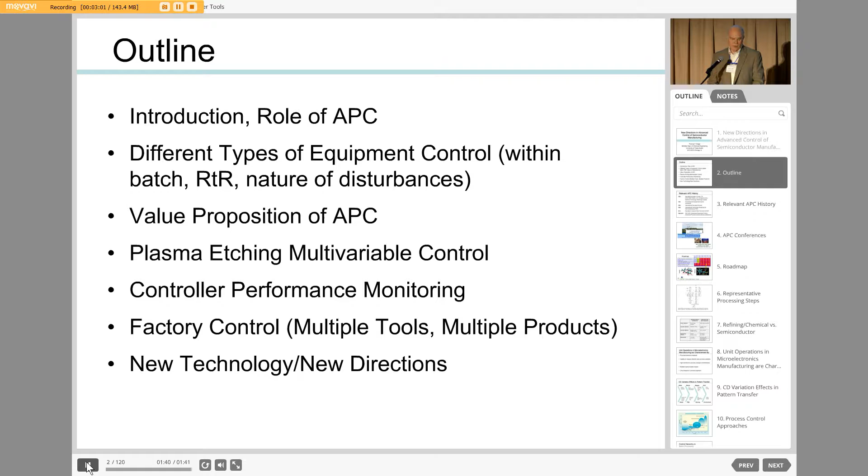So here's some history that gives you an idea about how APC came into the semiconductor industry. Probably one of the signal events that occurred back in the 80s was the formation of an organization called Sematech, which was really founded to combat the semiconductor activities, especially in Japan. So how can the U.S. compete? They viewed this as a defense imperative — that we need to be able to support this industry, not rely on foreign suppliers for chips for our defense industry.

So they put a bunch of money into it. They said only U.S. companies can be involved. And they actually started on this idea of technology roadmaps, which is, I think, a rather unusual part of what makes this industry rather interesting.

It didn't seem like they worried too much about control of equipment. You would basically buy equipment from a vendor, install it in your plant, and hope it works. Of course, they had their own software in there, their own ways of hooking up to the rest of the process. In fact, some of the equipment may have been built in garages in Southern California, for all I know. So it was really lots of different suppliers and vendors.

But then we started seeing some order out of the chaos, and they started having workshops on advanced equipment control — how do we do a better job of controlling the various unit operations in semiconductor manufacturing, et cetera. Then the wind kind of went out of the 'protect the national industry' push in '96. It became an international organization, so companies from outside the U.S. were welcomed in.

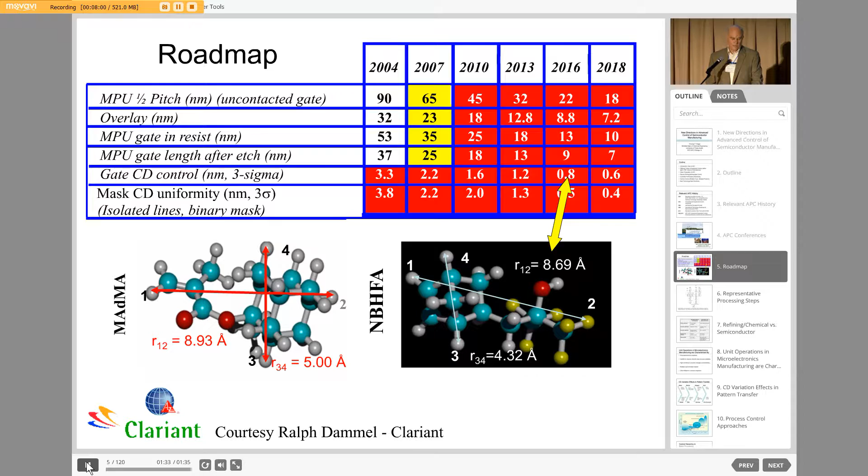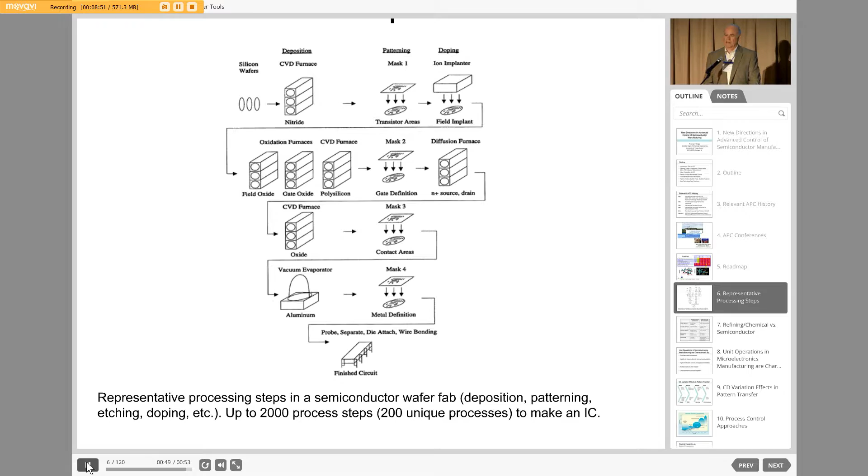So here you see maybe 10 different unit operations. Well, actually, in some fabs you have up to 2,000 process steps as they build up these layers of material, and that might involve 200 unique processes. So the complexity of what's going on here is just staggering, and it's a wonder that they can actually make the devices they intend to make.

It's also helpful to understand how this may be different, since many people may be more familiar with process control in the continuous industry, like refining and chemicals. We have different objectives in the semiconductor industry. First of all, it's largely batch and discrete rather than continuous.

Your primary objective is to end up with a device that has the right electrical properties, but then you're also going to try to control things like line width and critical dimension. And then for economics, you're trying to maximize yield and minimize cycle time so you can essentially make the largest number of good chips as fast as possible, using the equipment you have there most effectively.

The other problem is that once you make something, it's hard to unmake it or rework it. In refining and the chemical industry, they have storage tanks where they can say, oh, we missed the target on this one, let's blend it with something else. That's a luxury you don't have in the semiconductor industry.

And there's lots of measurements. In fact, there's no data famine that seems to be appearing here. There's plenty of data being produced.

So when you look at the different unit operations, what are their characteristics? Well, they're very physically and chemically complex. They are, in the end, either physical or chemical processes. There's a lot of things we can't measure. In fact, very rarely can we measure what's going on in the middle of one of these unit operations. We have to wait till the end.

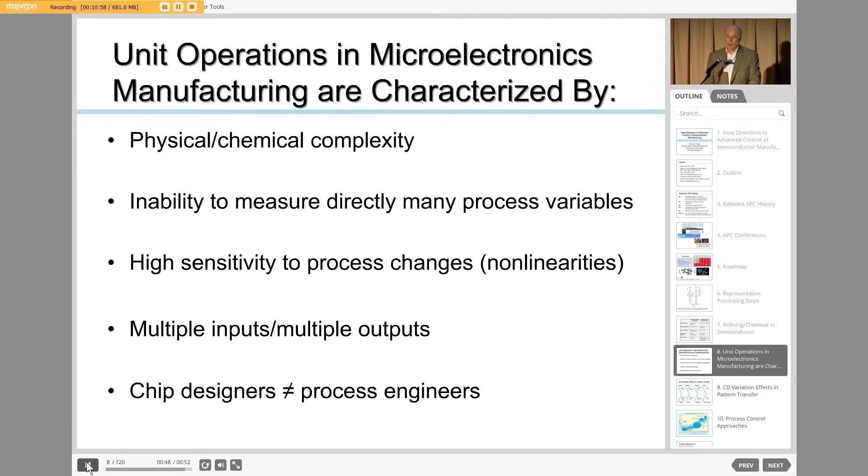They're very sensitive to process changes, nonlinear processes, and they all tend to be multiple input, multiple output. The other thing is that the people who design the chips are not the people who operate the plants. So as a result, there's sometimes a mismatch. Someone says, oh yeah, this will be a great chip with certain characteristics, and then the guys in manufacturing can't figure out how to make it or operate it successfully. So those are some of the challenges you face.

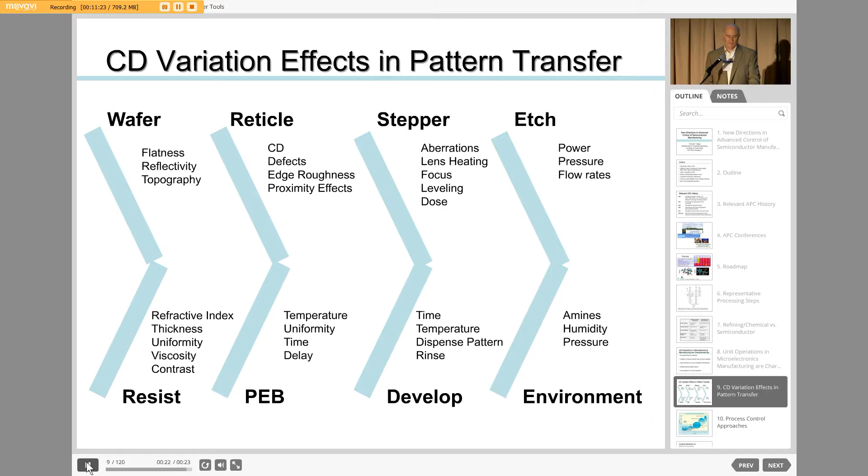You can actually have, from the time a bare wafer goes into a fab until the product finally comes out after going through all the steps, it might be 6 weeks. So from a scheduling and operation standpoint, it's very complex.

We can also worry about other things, like do we control each wafer, or do we have a bunch of wafers and try to control representative wafers that we can sample? But again, the big challenge is it's hard to get data in the middle of the operation. You almost have to wait most of the time till the end.

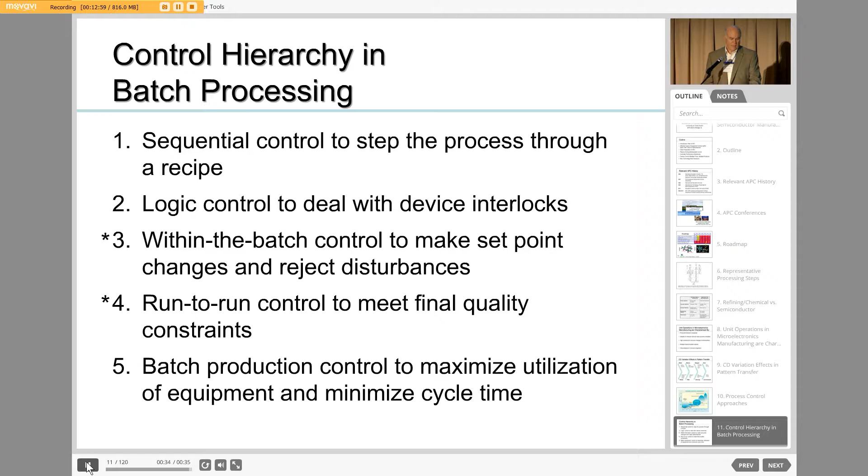Some of the characteristics: we have to satisfy the final product quality at each step along the way. If you do the math, if you're going to have 200 sequential steps and you're going to have 99% yield at each step, and you multiply those out, 0.99 to the 200th power, you end up with a fairly low yield overall. And so that's the challenge. Every step has to be done very well.

The other problem is that because you have a different industry that provides the tools, plasma etching, CVD, etc., to the manufacturers, they have to figure out how to combine those pieces of equipment with the way they operate their fab. The problem is you usually can't modify the hardware, software, or the tool, and that creates big problems. That, again, is another driver for why people have gone to run-to-run control.

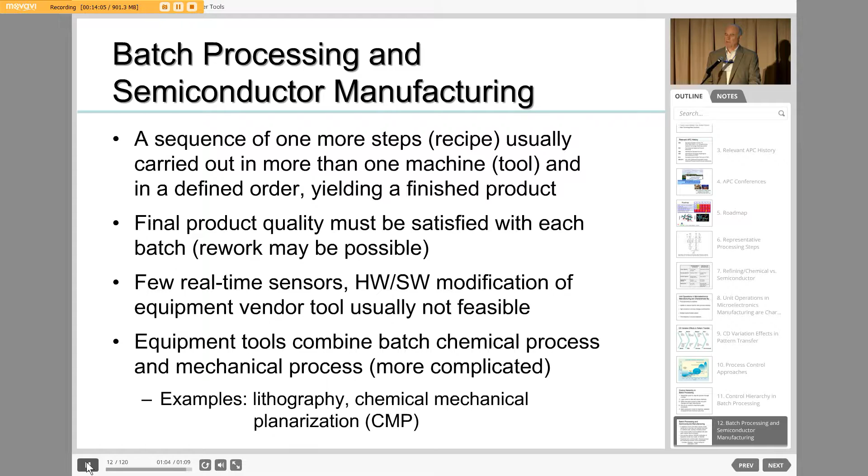The other part of this is that it's very complicated operations that can involve both chemical steps and also mechanical steps. A couple of examples would be lithography, and CMP, chemical mechanical polishing, or planarization.

It used to be that you have these gigantic fabs and lots of people running around in what we call bunny suits, and you had to control particulate matter, and it was just a very difficult situation. So the industry's gone more towards controlling what goes on in the tool, having a lot fewer people operating, and in fact moving everything around with robotics instead of having people moving these things around, and that's been largely implemented in the big fabs today.

Some other things we can do with batch processing that makes it a little bit different is that sometimes when things aren't going well in the batch, we actually can adjust the amount of time used for a certain process. You can decide, well, I'm going to etch this one maybe a little longer this time. So we can take advantage of the fact that this is a batch process.

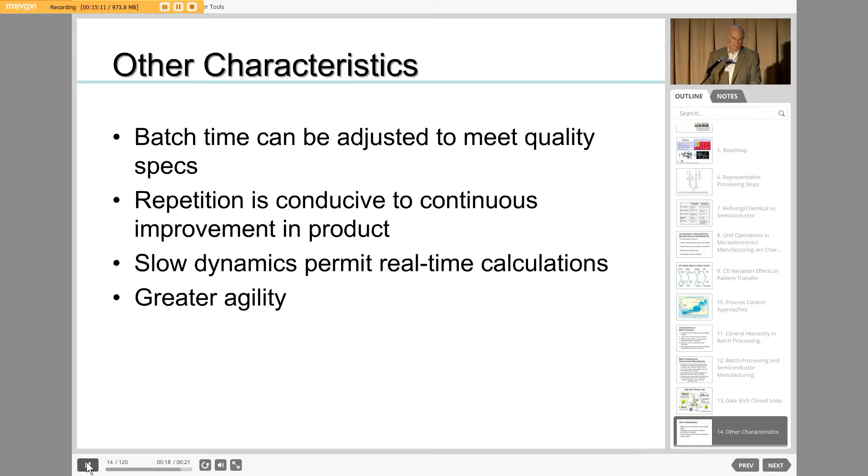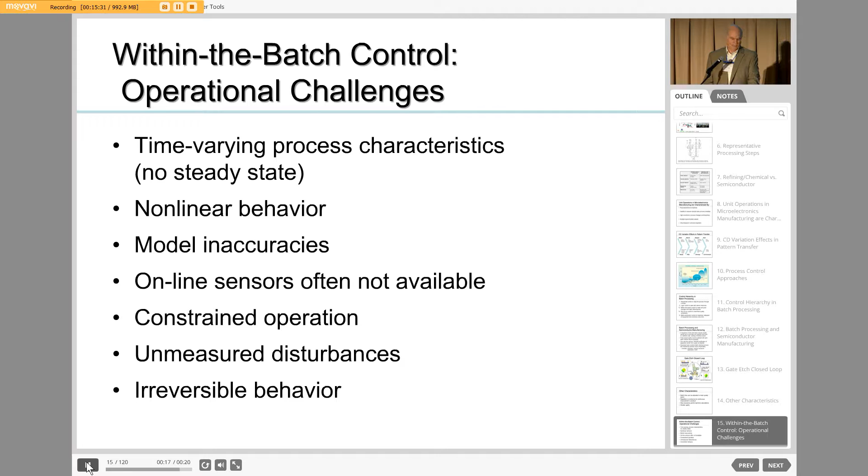Again, there's lots of challenges within the batch control. I'm going to talk about a couple of examples of where this is actually useful. Again, there's the whole problem of modeling it, nonlinear behavior. We don't have sensors that are going to do the job we need during the batch, et cetera. Lots of disturbances, behavior that's irreversible.

This worked pretty well as long as you had only 4-inch wafers. Once they went to 6-inch wafers, they started finding that the uniformity of the wafer was becoming a problem because of the nature of the heat transfer in the furnace. So gradually the industry moved towards single wafer control so they could actually do a much better job of controlling what happened on an individual wafer.

And the wafer size has actually grown over time. After they had 4-inch wafers, they went to 6-inch wafers, then 8-inch, then 12-inch, which is currently pretty much the max size, although interestingly enough, there are lots of 8-inch fabs out there and processing units that people use. They can make a profitable product, and as someone said, they've all been depreciated, so they actually have a low cost of ownership as well.

But basically, this is a way in which we get much better control of what happens on the wafer. There's talk about going to 18-inch wafers, or 450 millimeter wafers. That one is unclear. I couldn't get, when I talked to people in the industry about whether they really think that's going to happen, it's a very expensive proposition to talk about now all of a sudden changing your whole fab to a new generation of equipment. So again, there's some big economic barriers to doing that.

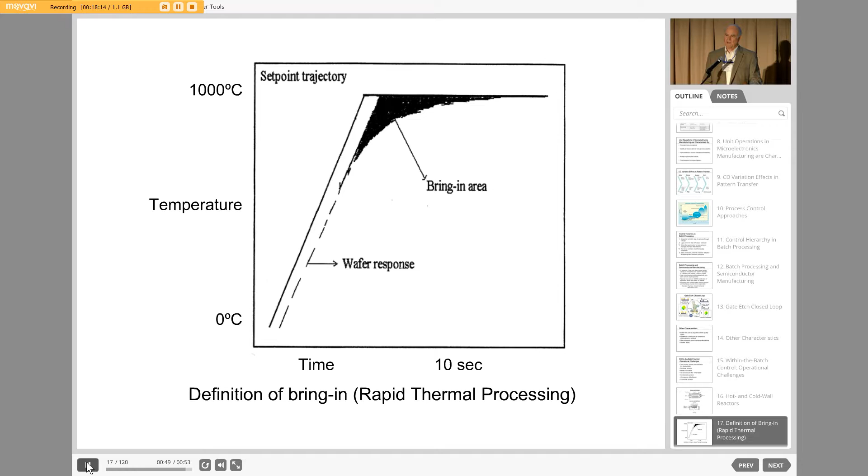This is something that's familiar to most of you in the room: we have a set point trajectory, and we like to be able to follow it. We have this black area there called the bring-in area, and essentially our goal is to minimize that. So we like to track the set point as closely as possible. You might say, well, why don't you just overshoot it? Well, if you overshoot, then you start damaging the material, and it doesn't turn out to be high quality. So we've got to actually bring it in as fast as possible with as little overshoot as possible.

So here would be a typical RTP reactor that's got these lamps that are radiating heat on the reactor. You can kind of see in the picture here, there are some maybe concentric zones of lamps there.

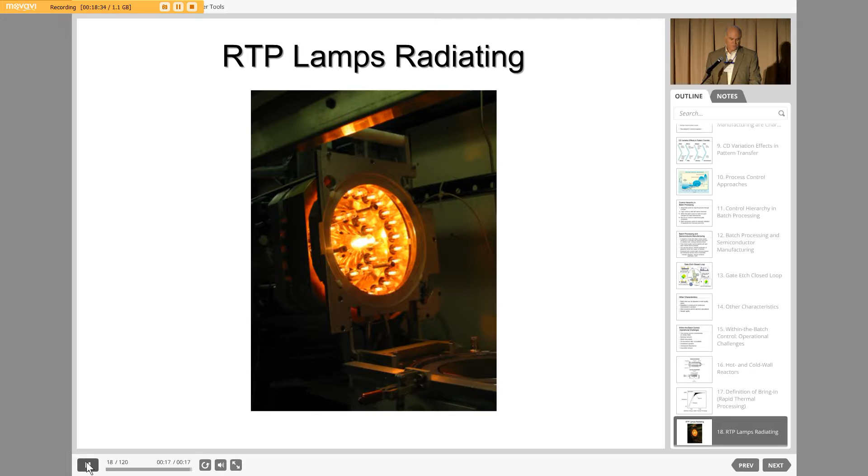In this case, we actually had thermocouples that we mounted in the wafer. Of course, you can't do that for actual practical operation. But again, in the early days, we were trying to show that we really need multivariable control in order to successfully control a reactor like this.

This was part of a DoD program in the early days of semiconductor manufacturing, 1993. And the student I worked with basically developed a nonlinear heat transfer driven model, and because it's radiation, you have T to the 4th terms in there, so clearly nonlinearity is at work there. We like to be able to control this thing in real time over a space of 10, 20 seconds.

So having used some of the ideas of model predictive control, or QDMC, formulated as a successive linearization type of problem. And then here are the results we got.

You can see that, if we're trying to ramp this system up from 400 up to 800 degrees C, we do a pretty good job of being able to get all 4 of these thermocouples to track the desired profile. Again, a little slower than maybe we wanted, but anyway, we were able to show you could do it and do it in real time, because the computer is basically cranking out new models as you go along, as you get up to the higher temperatures.

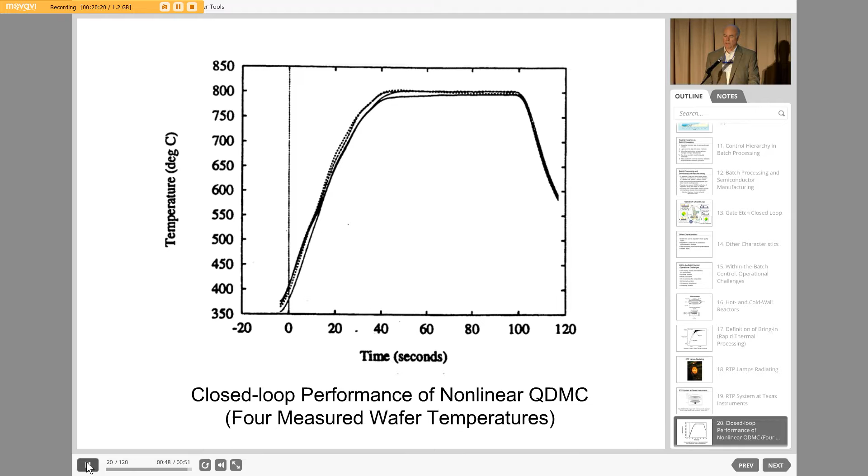So this is an example of what you could do, and again, this is a sort of approach that's used today. There's a lot of examples of model predictive control that have been used in the semiconductor industry, and I'll say more about that later.

Here's another system that essentially lended itself to model predictive control. This is CMP, chemical mechanical polishing, where you've got these arms that basically push down on a polishing pad that sits on top of the wafer. This is a way, again, of reducing - instead of etching, we actually polish the wafer down, depending on the material we're trying to remove.

This turns out to be, with the 5 arms, a multivariable control problem as well, and we have to worry about adjusting each of these arms. The arms are rotating around as well, so it's, again, a very complex mechanical process.

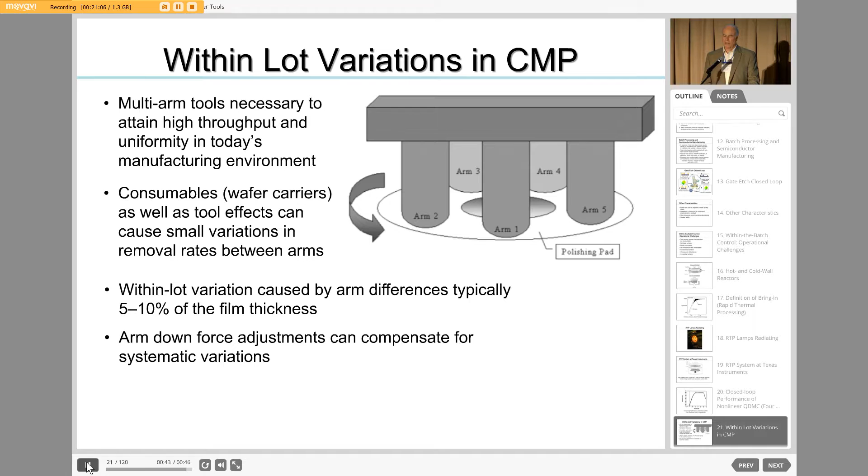We did this basically with the student Jarrett Campbell, who was at AMD part-time and part-time at UT. He had learned about model predictive control in classes, and he said, let's just figure out how we can apply it to this problem, and it turned out to lend itself really well. Having scoured the patent literature, I think this was probably the first application of model predictive control in the semiconductor industry on an actual commercial tool.

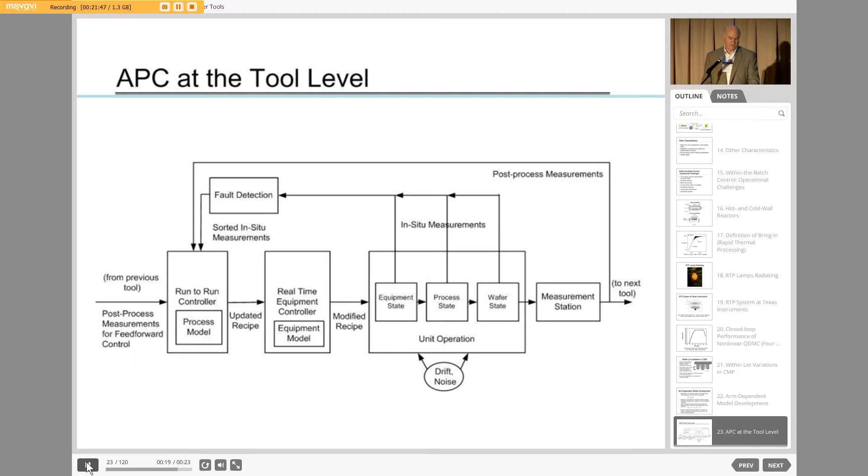So again, we worry about how we do this at the tool level. We're now going to talk about things like run-to-run control - that's part of what you see here. We also have fault detection we have to worry about. I'm not going to talk much about fault detection in this lecture just because of lack of time, but there certainly are lots of opportunities to look at that.

Again, variation is the name of the game here. Things are changing all the time. We've got tools that behave differently. We have different lots, and they get exposed to different tools at different points in time. Chambers change over time. You have what's called seasoning of a chamber, that after a while the chamber operates consistently for a while, but then you start getting deposits internally, and then it doesn't operate quite the same.

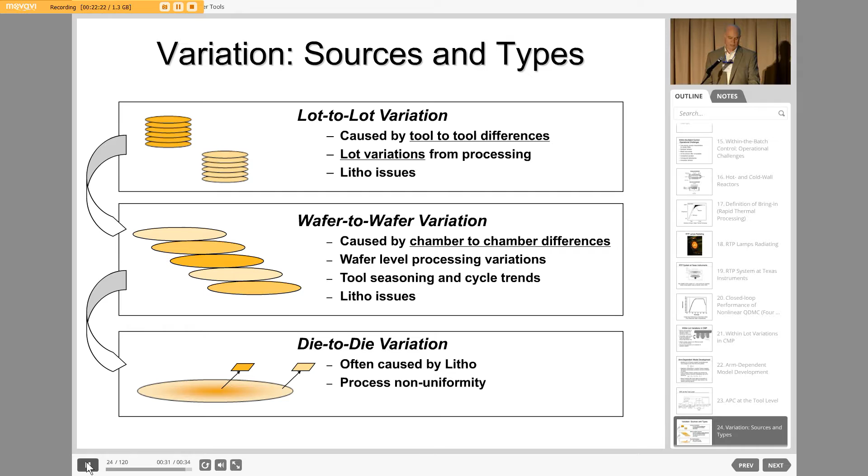So keeping track of all this is very hard to do. I have to decide when I'm going to shut down the system. That's expensive to do, and so on. So those are some of the things we worry about.

So I mentioned run-to-run control. We'll go through this again. There's a few equations in here that we can talk about. The whole idea is because we can't measure during the batch.

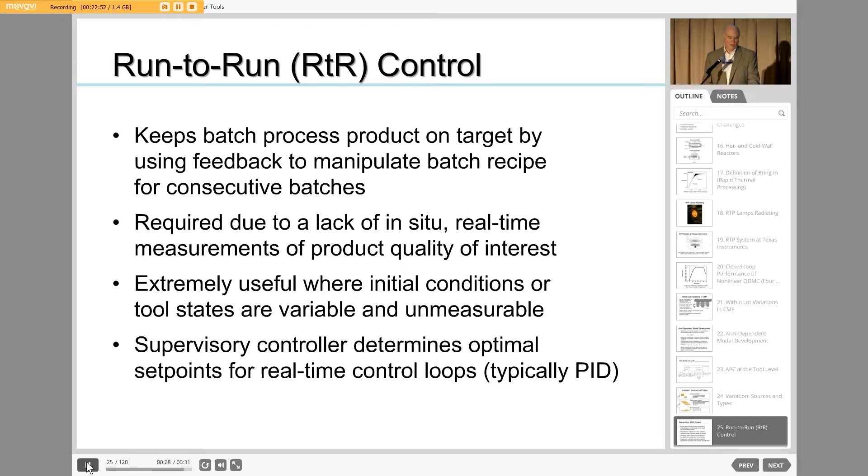It's hard to do. That previous example I gave you, we actually had to put thermocouples on the wafer. Well, that's not feasible in an actual operation. So we're pretty much stuck with saying let's measure it at the end of the run and essentially adjust after every run what we're doing with the process. And so it does set up nicely as a discrete time process, and it is good for handling the kinds of variations and problems we run into, and we can do run-to-run optimization as well.

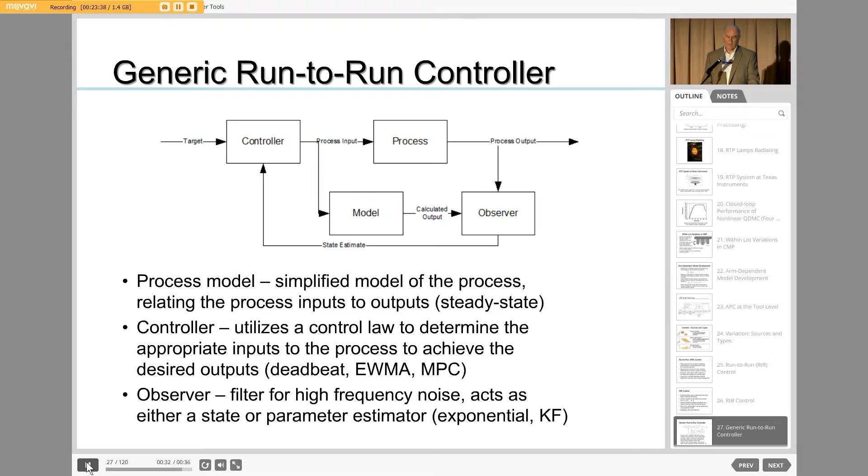This is basically the model predictive control or internal model control viewpoint. We've got a controller which tends to be real simple, a deadbeat controller, or we can use MPC, EWMA. The process is going to be fairly simplified. I'll show you a typical model used for run-to-run control. And then we have an observer that basically has to filter the noise out of the system and other things that are changing as well. So people typically use exponential filters or Kalman filtering.

So here's a standard thing. You might look at this and laugh, say well, that's so simple even a caveman can do it, and that's right. But with all the other things changing in the fab, you don't actually want to add another complexity. So this has been extremely successful. I'm going to show you some results obtained just by using run-to-run control. But basically, the model is really simple. It's linear.

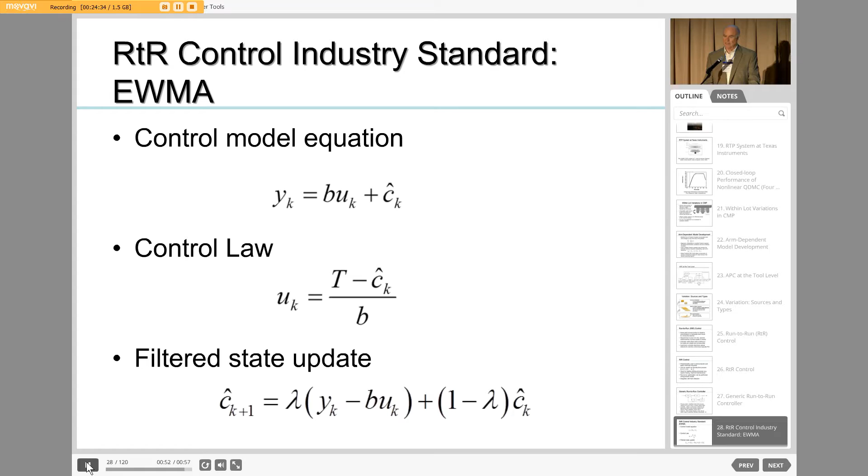Essentially at the end of the batch, you're going to compare the measurement y against the target, and then calculate a deadbeat controller. Then we filter the state update. When you wrap all this together, you basically have an integral controller. We're familiar with PID controllers in the process control world - this is essentially an even simpler case, but it's applied on a run-to-run basis.

And of course, the whole goal is to narrow the distribution as well and improve the CPK or process capability. All these things came out of one of these early studies on run-to-run control, and everyone started latching onto it, saying this is a way we can increase yield, which improves our economics. We'll reduce the amount of scrap we make, since those are lost products you can't sell. We'll be able to run the equipment more often, have a higher yield in terms of good wafers, and maybe run faster and reduce cycle time. So those are all things that affect the economics.

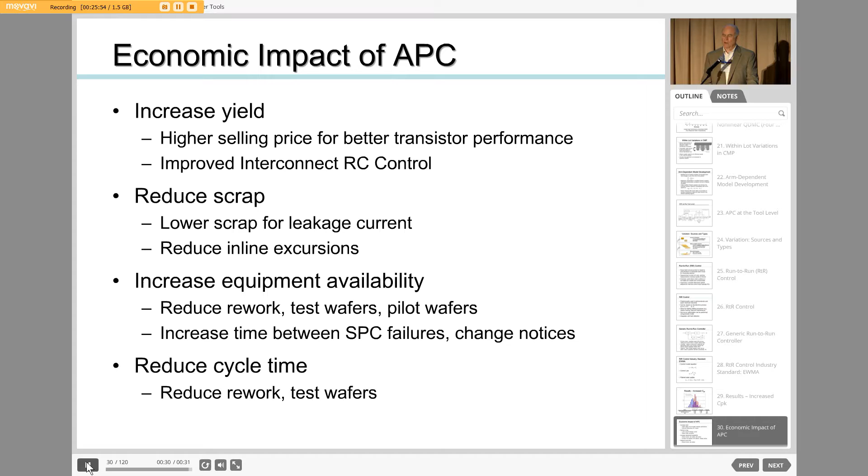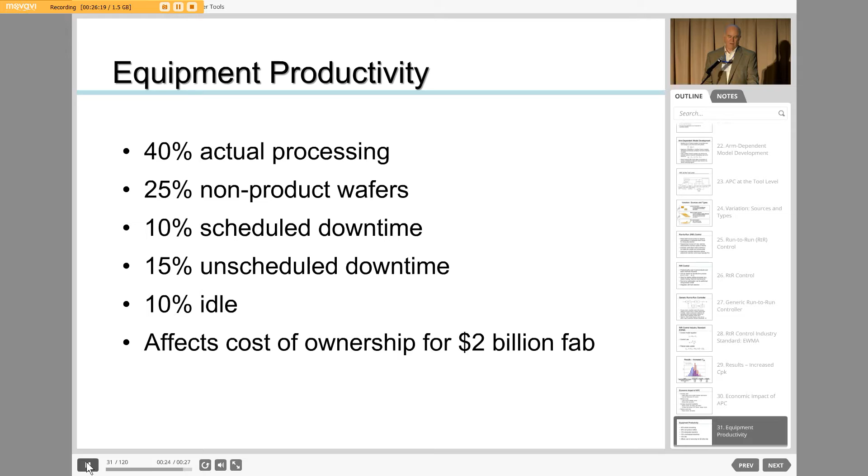In a typical fab, you've got a lot of interesting things going on in terms of when you're actually making good wafers - how often are you sending through pilot wafers to try out a piece of equipment after it's been shut down? That's a cost. You've got scheduled downtime and unscheduled downtime, and sometimes it's idle. The cost of ownership issue is always with you, and when you've got a fab that costs anywhere from $2 billion to $4 billion, people pay a lot of attention to how much the equipment is getting utilized. Here's a good example showing why going to something like run-to-run control was effective in improving CD control on the gate.

So here are just a couple of numbers about what happened in the case I just mentioned: they were able to increase the speed by 8%, reduce the variability, and greatly reduce the amount of bad chips they had to rework.

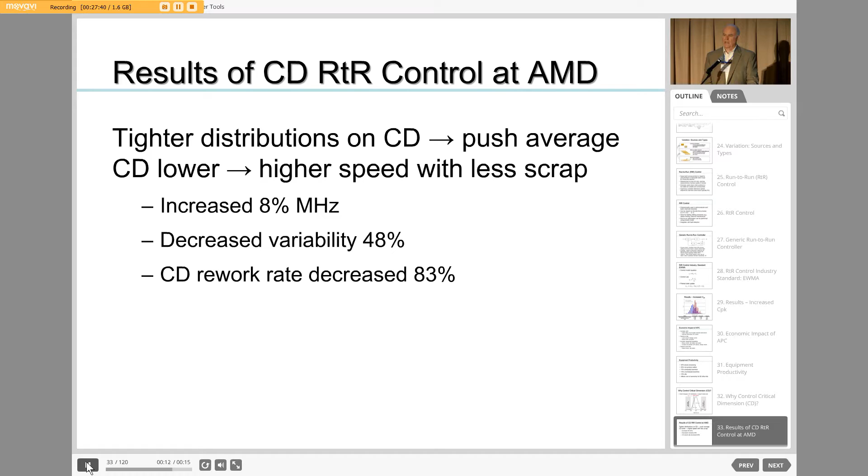And when you translate that into what does that mean in terms of savings or increased profit? This is like the capacity argument. If I can increase the capacity, then I can essentially make a lot more money because I can take all those chips that were bad before, now they're good, and then sell them.

In a competitive business, when AMD was fighting against Intel, that was one of their standard competitors. When they had an improvement, they could sell a whole lot of chips. So this made a big argument. $240 million a year is a fairly powerful argument for why you need a bunch of people doing APC. That argument was actually successfully used at AMD. They hired a whole lot of PhD students from my group and other groups. So that was a good thing that happened.

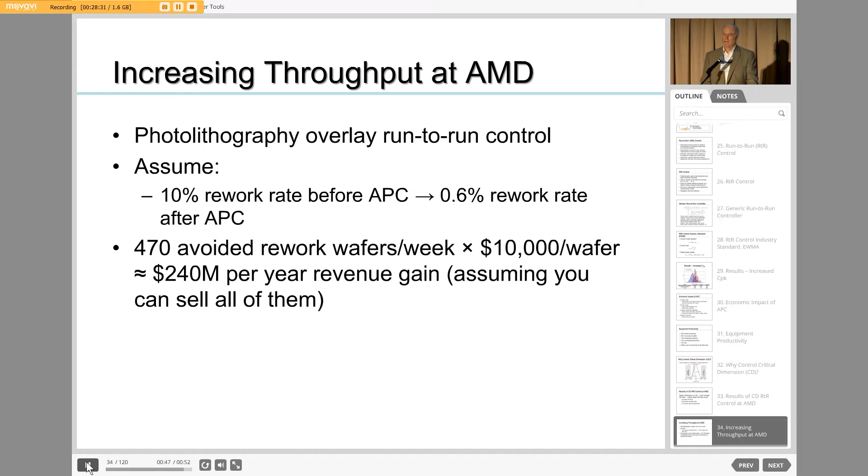So here you get an idea - this was actually some work we did with Samsung - that we could have as many as 1,300 different sensors or data points on a plasma etcher. And the question is, how do I take those measurements and then translate them into manipulated variable actions? Sensor selection algorithms is essentially paramount. I think we've got a lot of work to do on that one. That's not a problem that's really been, I think, well solved yet.

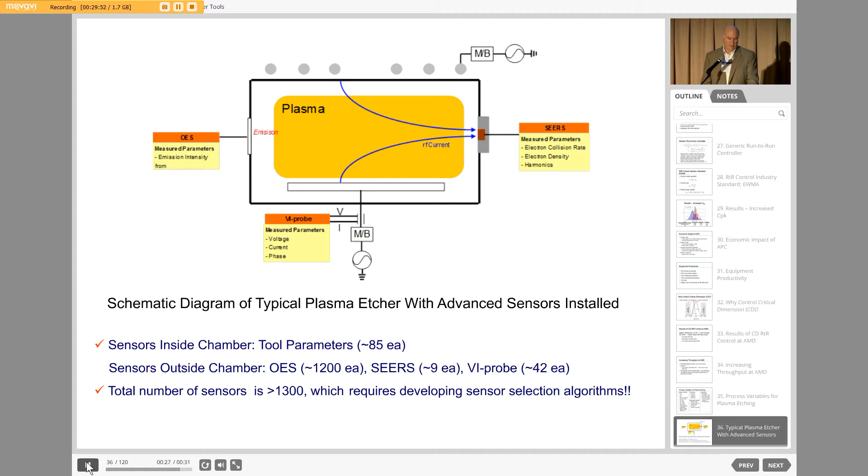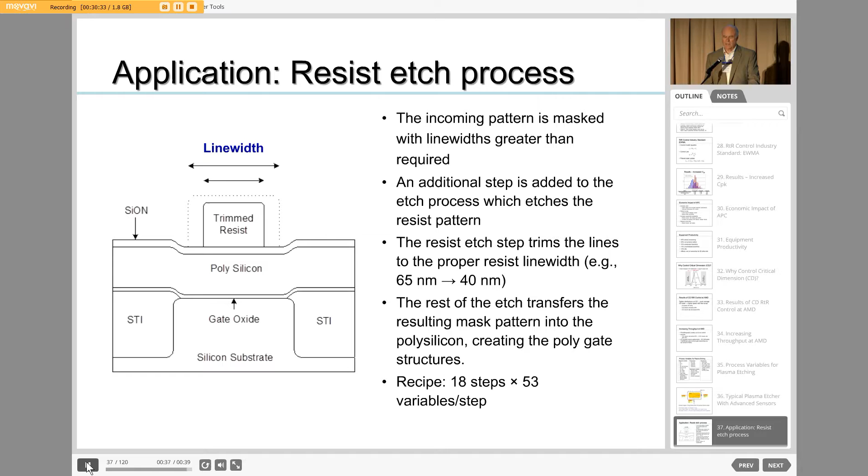But of course, we have to be able to measure things. In fact, in this case, scatterometry, which is fairly expensive, was used as a way of measuring some of the variables. So this project, again, was to look at interactions between lithography and etch. It wasn't just worrying about critical dimension, CD, but also what does the sidewall angle look like? And then finally, what's the uniformity on a large wafer? Are we able to get, for every device that we're going to make on a wafer, a consistent result? So those are the challenges.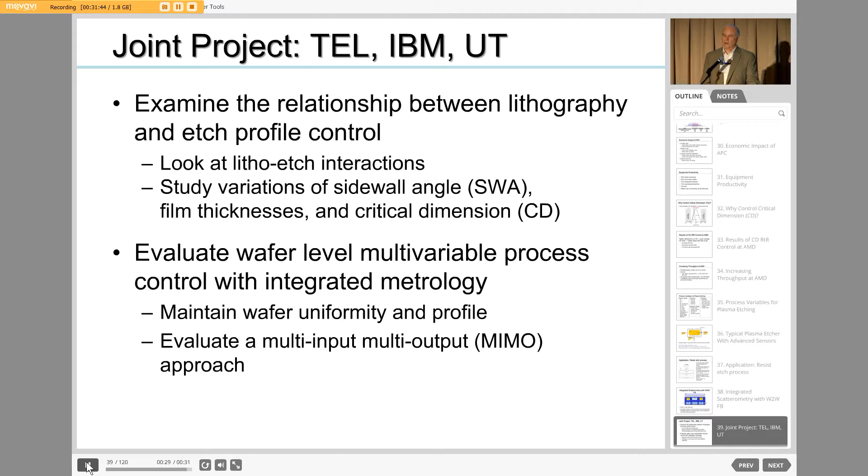So again, adding the sidewall angle, which was found to have a significant effect on the performance of the chip, was essentially a new part of this. And of course, the other problem is, how do we model the system? We have to understand what the interactions are between the different variables.

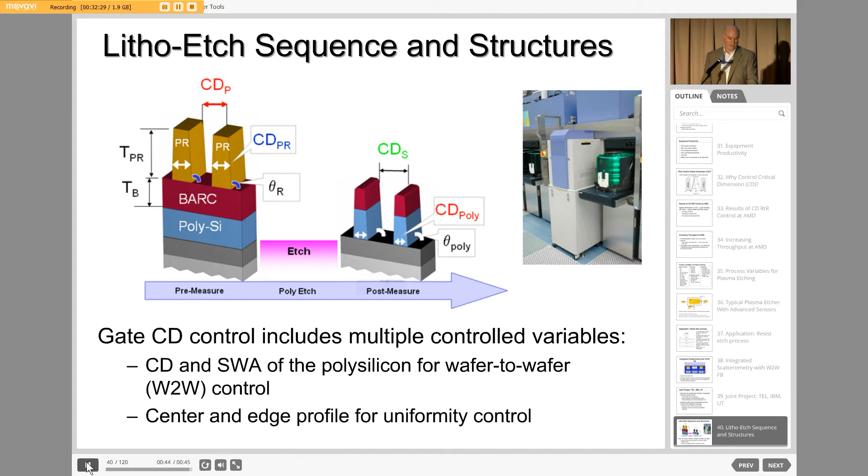So here again, you see how the profile is going to transfer onto this polysilicon. And then we're going to try to understand exactly how all the different variables are related. So it's a chemical process.

You can see we've got lots of little cartoons here about what the different chemistry is involved. We did not try to model the chemistry because that became a fairly impossible problem that really couldn't be implemented in a manufacturing environment.

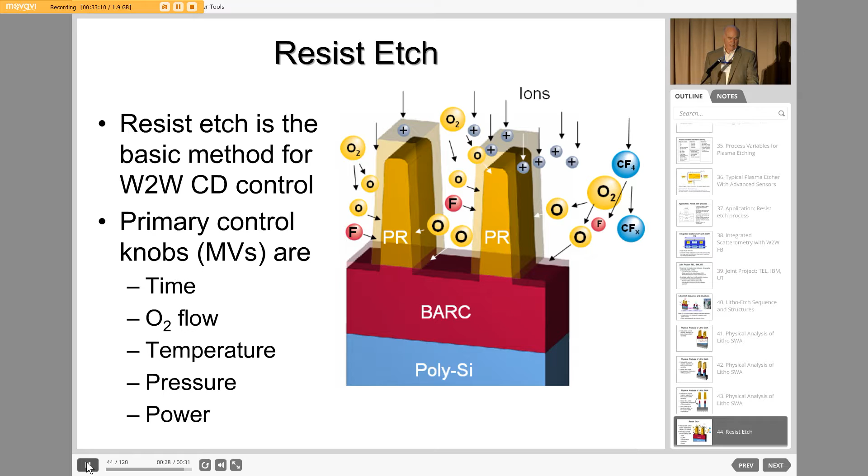So we said, okay, let's just try to understand what the control knobs are, the manipulated variables, and we'll figure out what the control variable is going to be. Depending on whether it's the resist etch or the polysilicon etch, we had different variable relationships that may be operated there, and perhaps different manipulated variables.

One of the purposes of this study was to really figure out what are the best manipulated variables to use in what was essentially a non-square system.

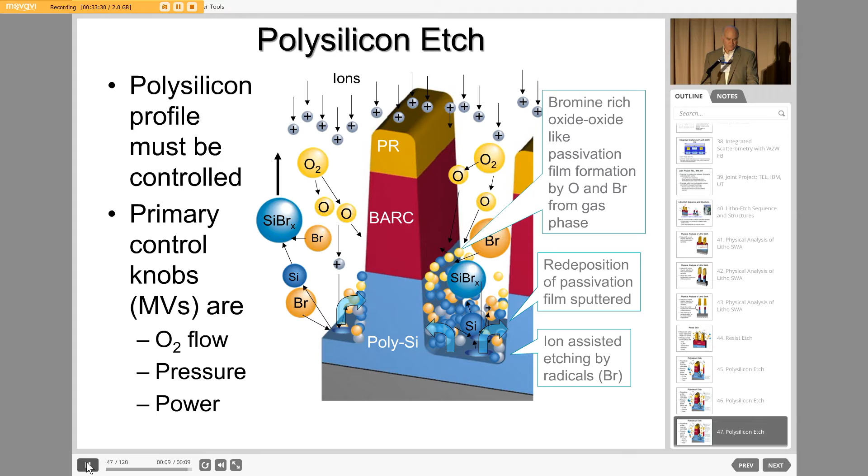Again, the idea: let's stick with the simple models, use design of experiments, develop some nonlinear models, and then wrap that into some sort of run-to-run control framework. So it's a multivariable control problem that we can use quadratic optimization on, with constraints that we have to worry about.

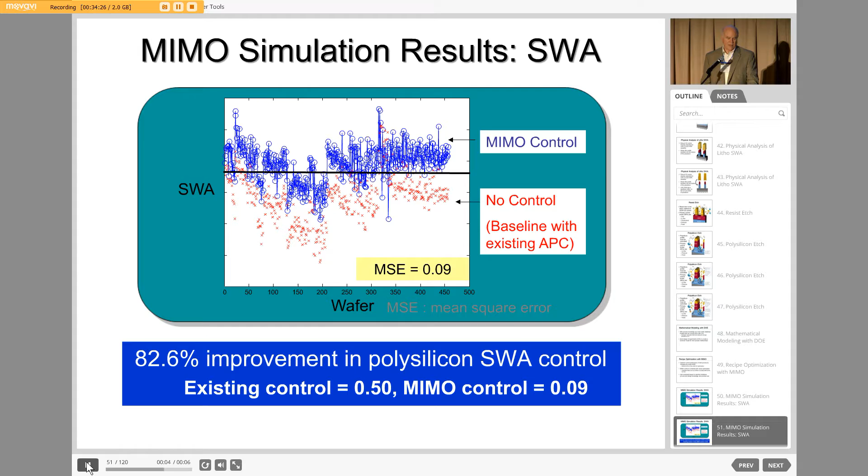So percent improvement, about 80%. That was really, I think, a great result. The CD delta is, again, getting the difference between the CD on two spots on the wafer, one near the center of the wafer, one at the edge of the wafer.

And again, you can see with MIMO control, we can do a lot better job of staying close to the target. The red X's are where we don't control for that, and you can see it works very poorly. So this demonstrates the value of APC.

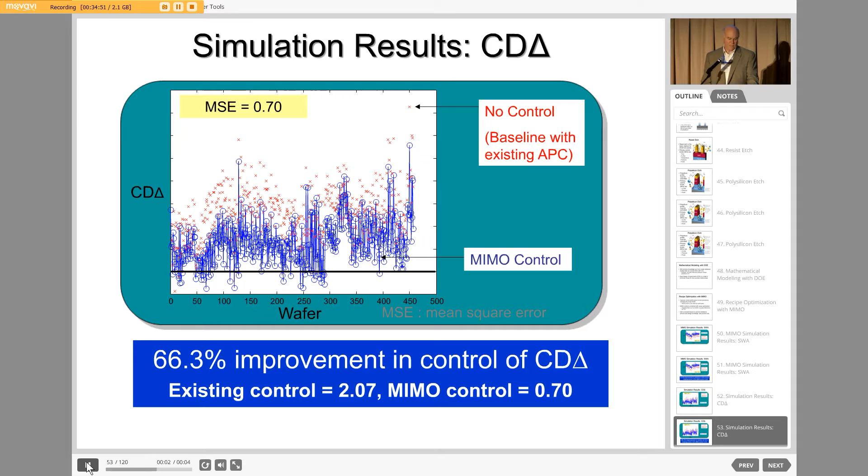And then the summary table here is just to show you some of the percentage improvements, but again, quite significant, quite motivating. We basically worked on this project and then it was handed back to the vendor and IBM, who then didn't tell us what they did after that point, but it was clear that they were going to work on it.

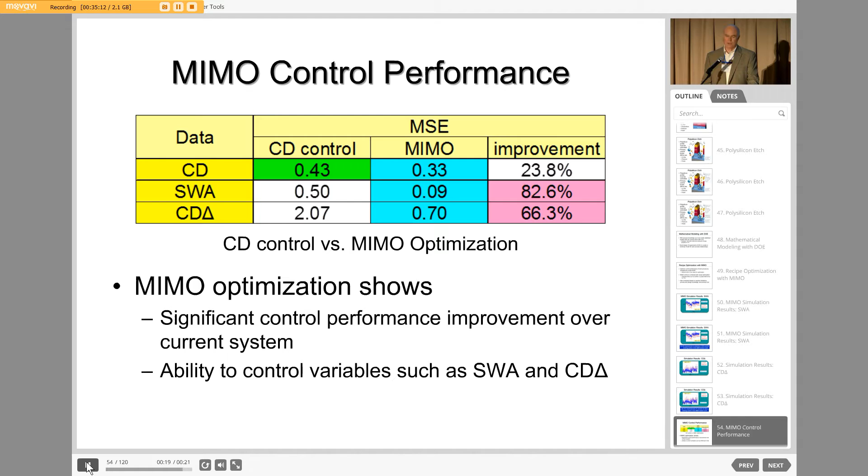So another part of this is, with all these run-to-run control loops, how do we know how well they're doing? We basically did a controller performance monitoring project with Texas Instruments to look at what happens. The term high-mix fab, by the way, refers to a fab where you're running lots of different products as well as lots of different tools.

The whole idea is that zeta is essentially a measure of how well you're doing. The closer you are to 1, the better you are to optimal performance, which would be essentially minimum variance. And if you're off of less than 1, that means you're not performing as well.

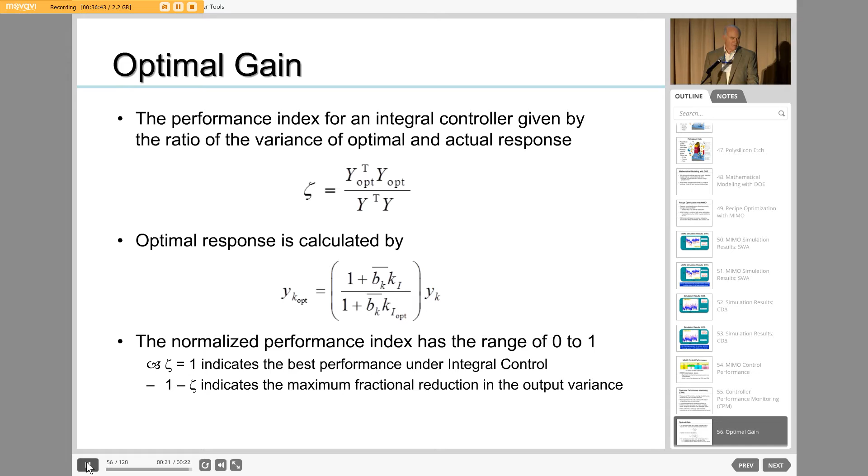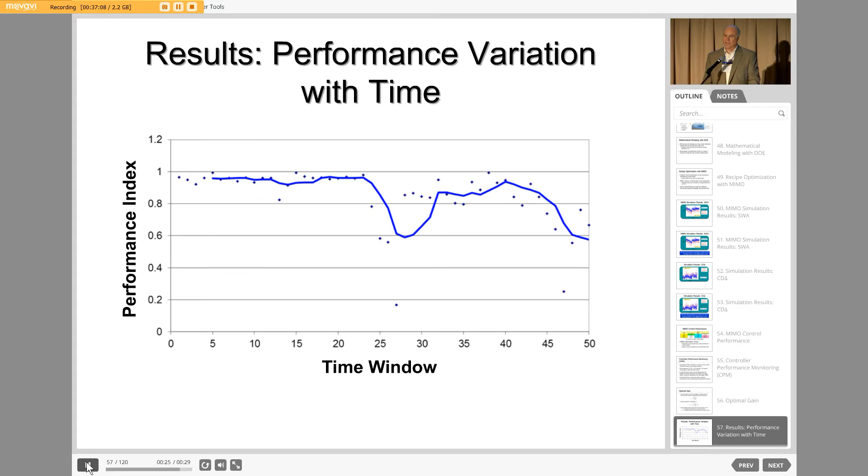So there's a lot of things you could do here in performance monitoring. I mentioned a few of them. One of the problems is that when you think something is going bad, how quickly can you operate on or change things? That is actually a big challenge. We worked on it for a while, and we weren't able to get down to where you can find this out in 2 or 3 wafers. It's more like 10, 15, or 20 wafers. So that's a challenge, figuring out how to do that given the nature of the data you have.

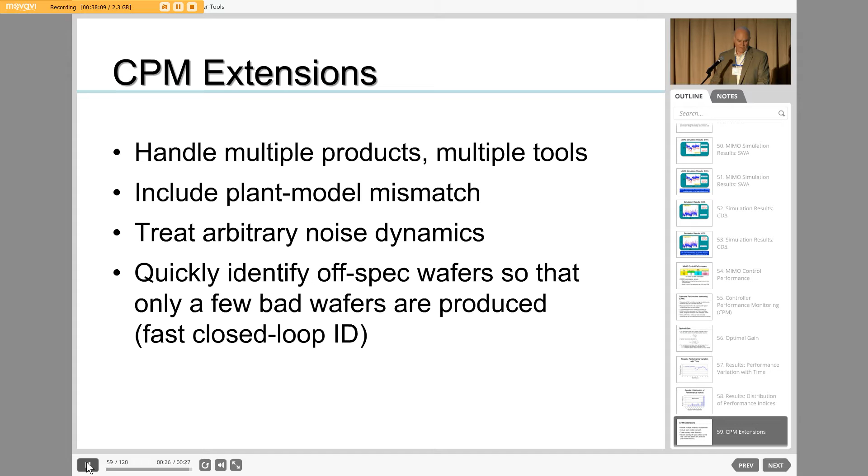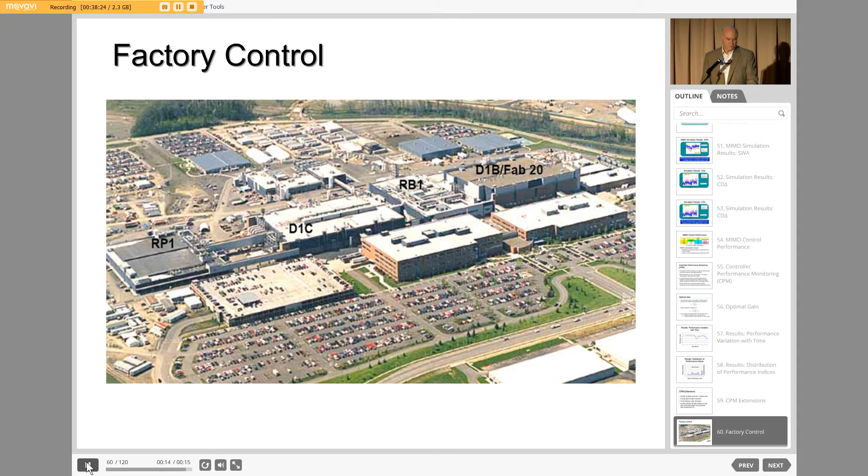The notion of fab-wide control came up roughly about 10 years ago, and how are all these different unit operations going to work together? We have islands of control that are basically different pieces of the process, but we still have to worry about what happens on the overall fab.

So putting this all together is very challenging, but companies like AMD were very successful in doing it. By the way, AMD is now called GlobalFoundries because they split up the company about 4 or 5 years ago.

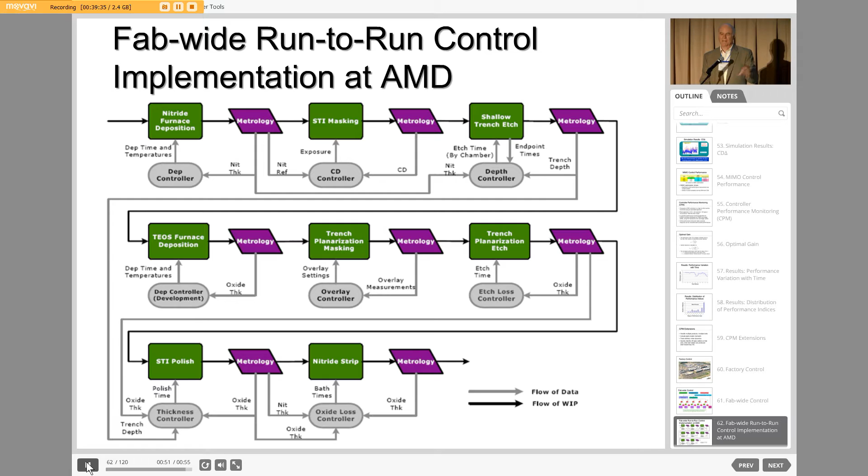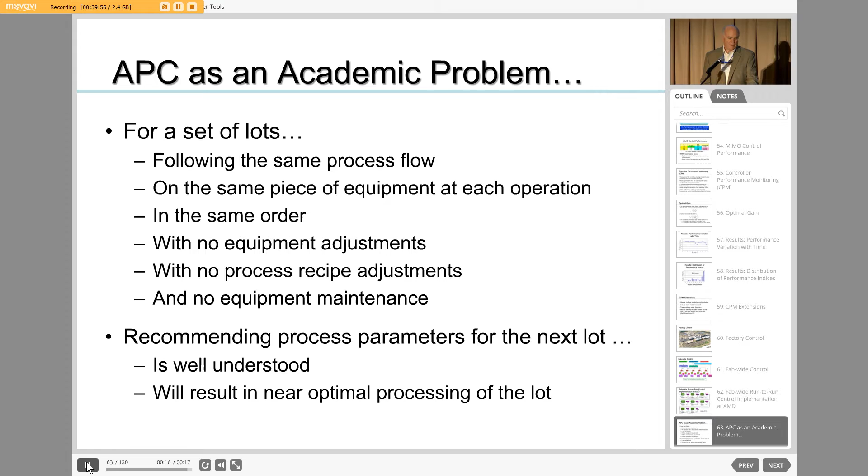If you think about this complex set of unit operations, as long as we think about APC, we know everything that's going on. We're not going to change anything on the fly, we're not changing the recipes, there's no equipment maintenance that takes a piece of equipment out of service. Then we can lay this all out, solve an OR problem, and figure out how it's going to be done. But the problem is, in the real fab, you've got lots of things going on: reworks, equipment that isn't available, equipment in parallel with multiple pieces that have different behaviors, and you don't know which piece of equipment your wafer is going to go through. So how do you adjust to that? You've got people running pilot wafers, engineering lots, and so on.

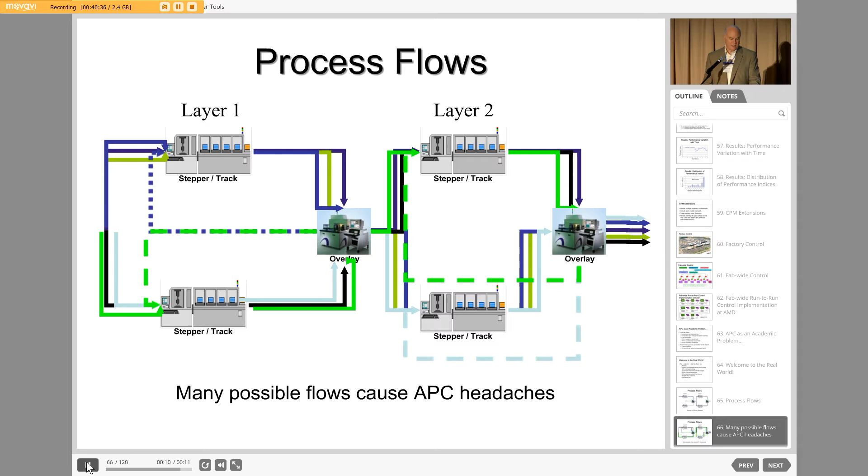So the process flows might start off looking fairly simple, but as things happen in the fab with multiple pieces of equipment and scheduling things, and you're making different products, the process flows become very complex. This idea of a multi-product, multi-tool processing facility came into vogue in the 2000s. The problem is we're trying to keep track of multi-product situations. If we're making more than one product but have one process, that's a fairly easy problem to solve. And if I have a single product and, say, two processes, I can figure out how to do that. But when I've got multi-product, multi-process, things become very complicated.

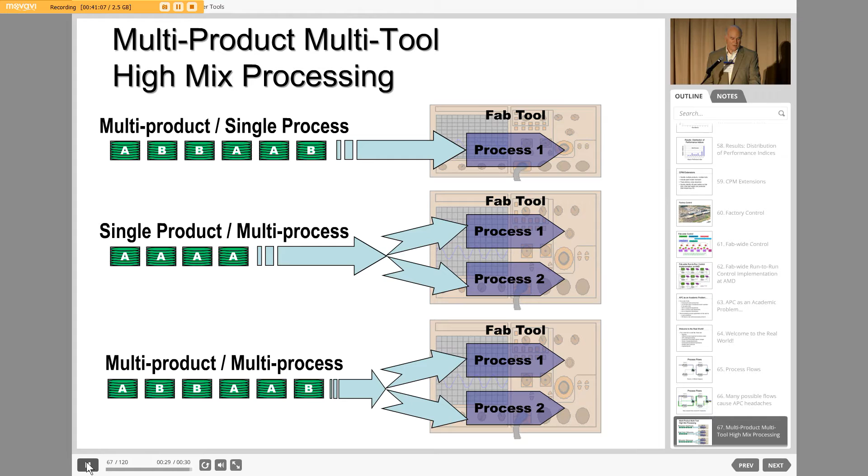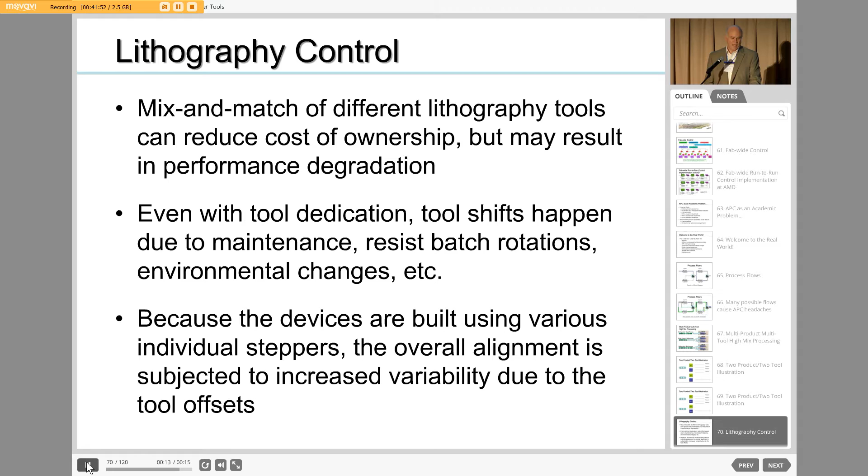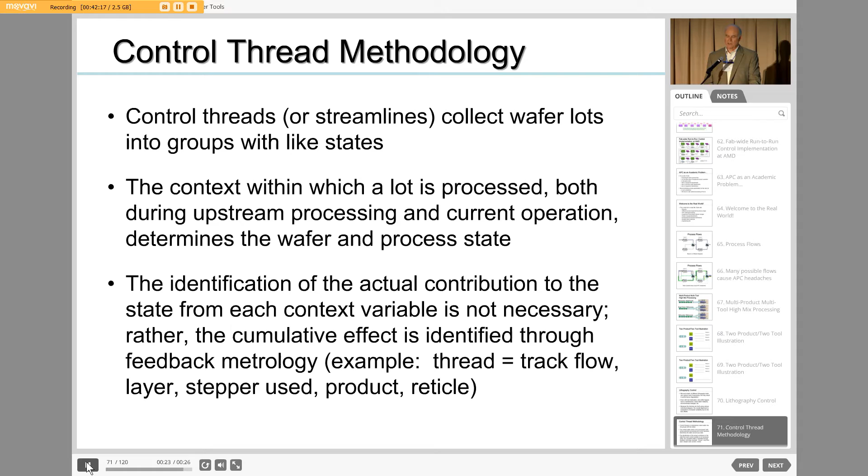So this idea of mixing and matching, that you've got different pieces of equipment, different products, and what is the right tool to use, what's the best one. But things happen along the way, tools change. There's this idea of control threads that was introduced in the early 2000s to really keep track of the path that the wafer takes and understand what each piece of equipment is doing along the way. That's called the context, which is the conditions in which it's operating and what variables you're essentially worrying about.

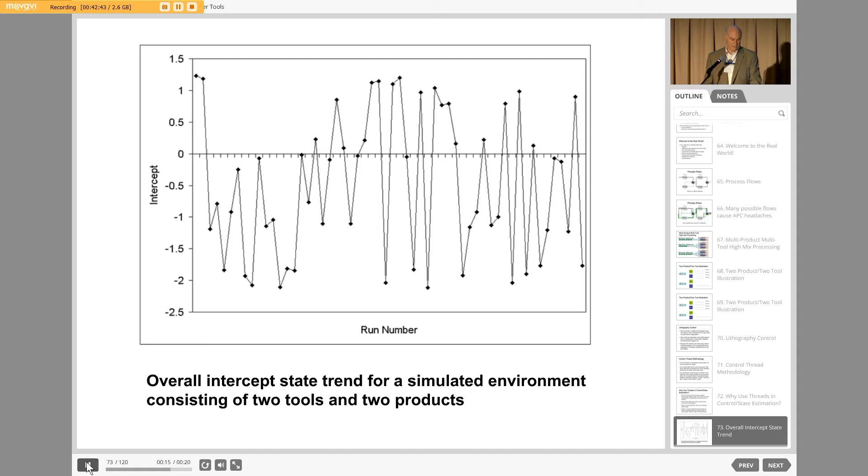This was essentially an idea tried early on because of all the sources of variation. If, without defining threads, you lumped all this data together, here you see a plot of essentially watching all these different wafers coming out from different tools. You look at a plot like this and say, well, hey, this process is not in control, because things are going all over the place. This is two tools and two products, so a real simple simulation.

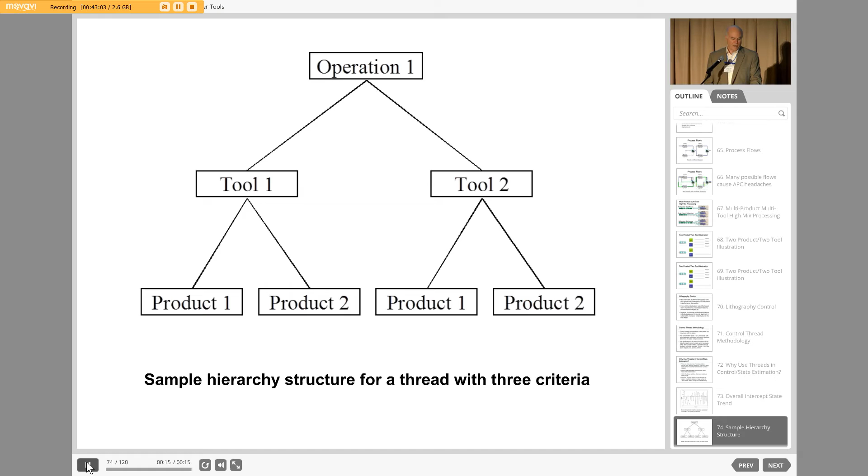Without threads, there are going to be the white boxes, empty boxes, and the dark boxes. Using threads, and it's pretty clear that threads was a lot better approach.

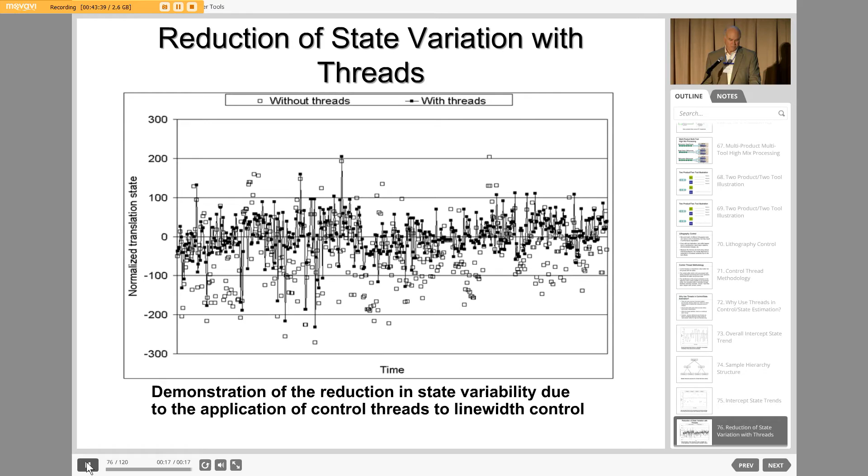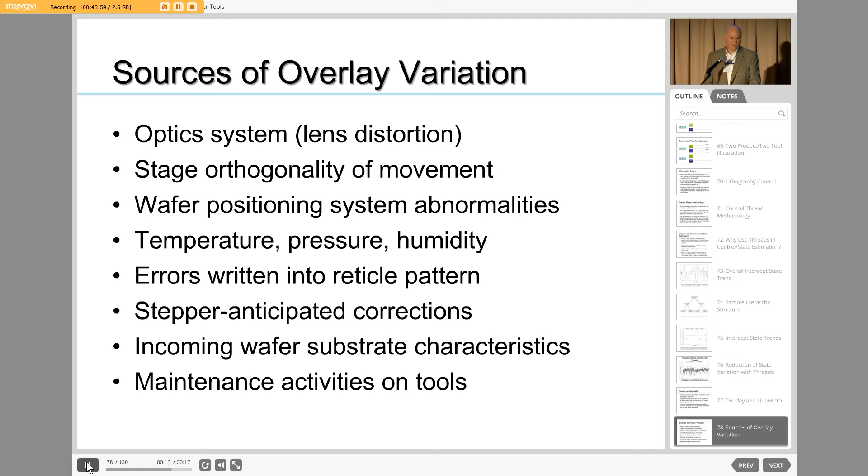But one of the problems -- and again, this was used in overlay and line width -- we had to basically worry about lots of variation in overlay. Here you see, and this is a very complex system where you're trying to actually create the image, you can see all the things that can be going on in overlay. That's a problem for us.

It's a very complex process where you have essentially markers on each level where you're trying to figure out where is the wafer position, and how is one layer positioned relative to another layer. You worry about translation, magnification, rotation. So lots of things can happen in this mechanical movement of the wafer, and how do we keep track of all this? So again, complexity rules.

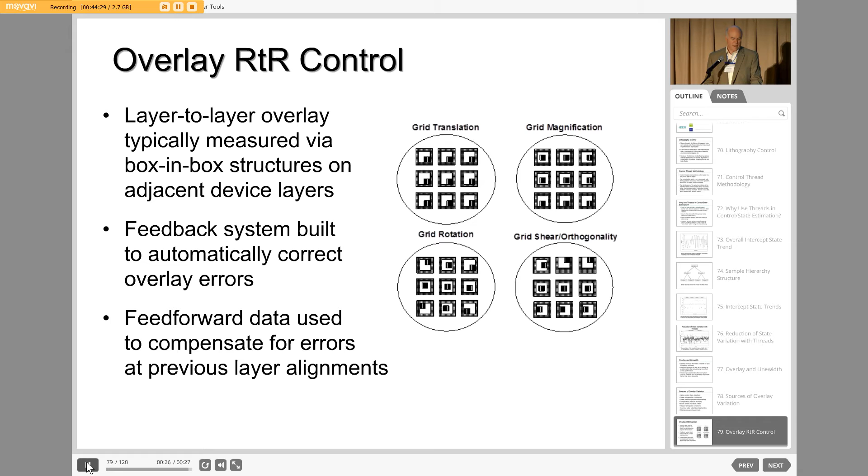But we figured this out with a student named Bode -- not related to the famous Bode, by the way, but we'll let that go for now. In this case, they were trying to control 8 different overlay parameters or variables, and you see them listed there. Again, a very complex process, but one that set itself up very well for LMPC. In fact, I should mention that this paper actually won the IFAC Control Engineering Prize back in the early 2000s.

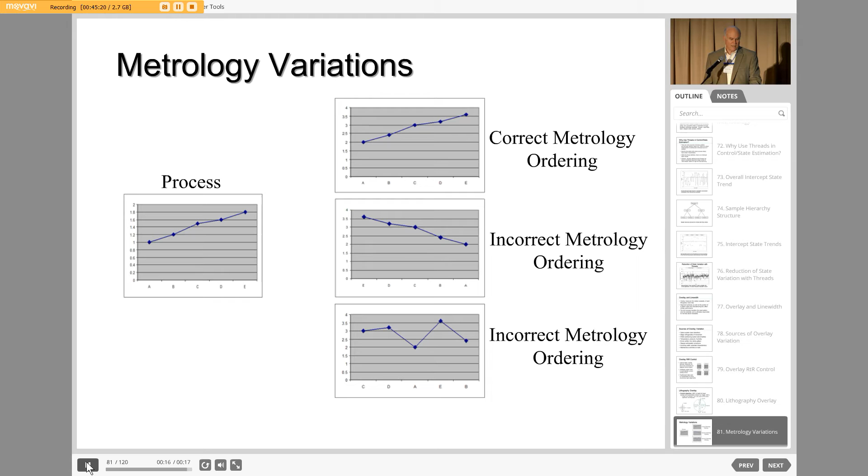Okay, so metrology variations -- as I showed you, you're not sure what order things are going on. If you're not careful about how you track things, you could basically take the data on the left and then reorder it, and the trends you're going to get from that are going to be totally different than what you expect. So asynchronous feedback became a big problem, taking things out of order. The problem is that sometimes stuff happens in a fab, so you have to do things out of order. You have to keep track of the data, and it's very challenging.

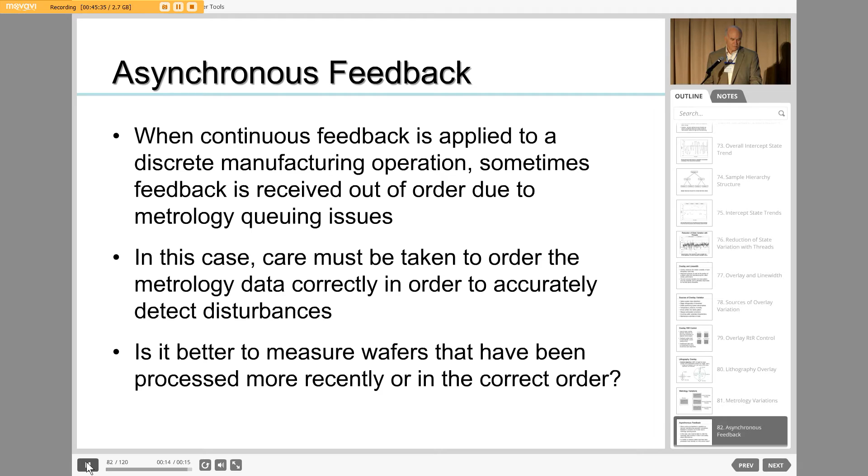One of the things we discovered is that the other problem with threads is if you had too many threads and too many variables, the number of threads you had to keep track of became astronomical, the so-called curse of dimensionality. So we worked on the idea of keeping track of what each tool is doing as it goes along with each wafer or product, then combining all that information using tools of estimation control to analyze and mine the data, figure out what's going on instead of the thread approach, because that was going to become hard to do as we went to more products.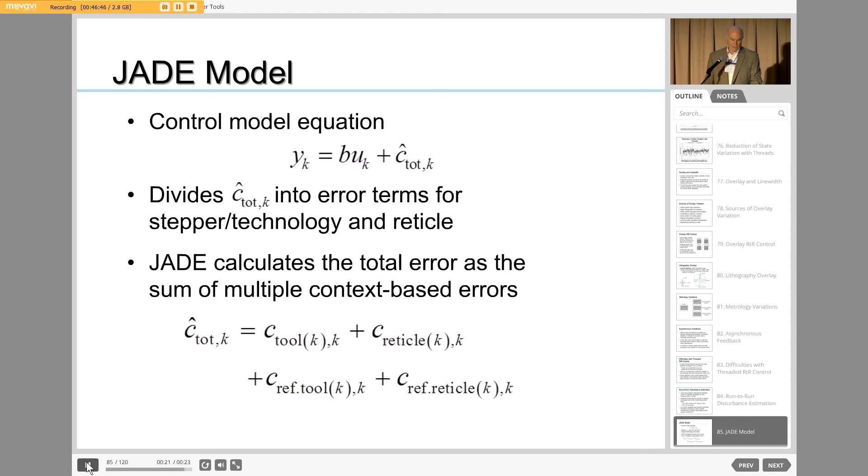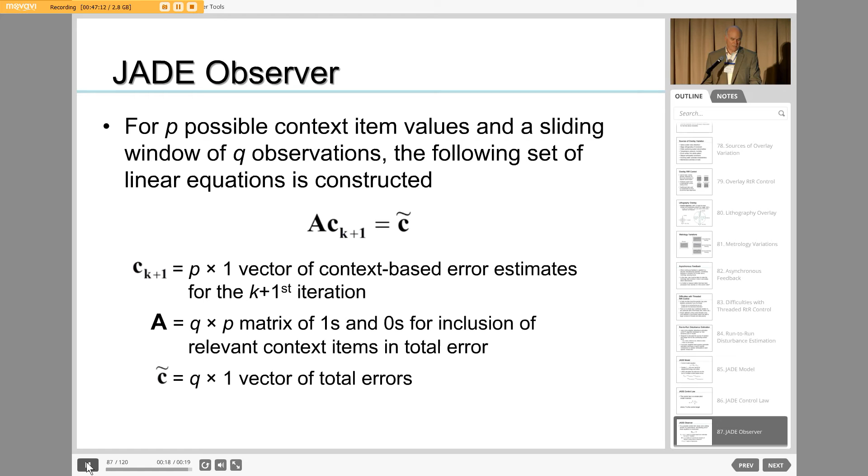The control law is simple, the deadbeat control law, and the notion is you're going to solve essentially a non-square problem, a set of equations with more equations than unknowns. It's also an ill-conditioned matrix, which is a problem as well. The A's are all ones and zeros, which makes it an interesting mathematical construct. We have a weighting matrix that introduces a filtering effect, a lot like the linear quadratic problem.

We did some simulations to give you an idea of how well it worked. Let me skip ahead here.

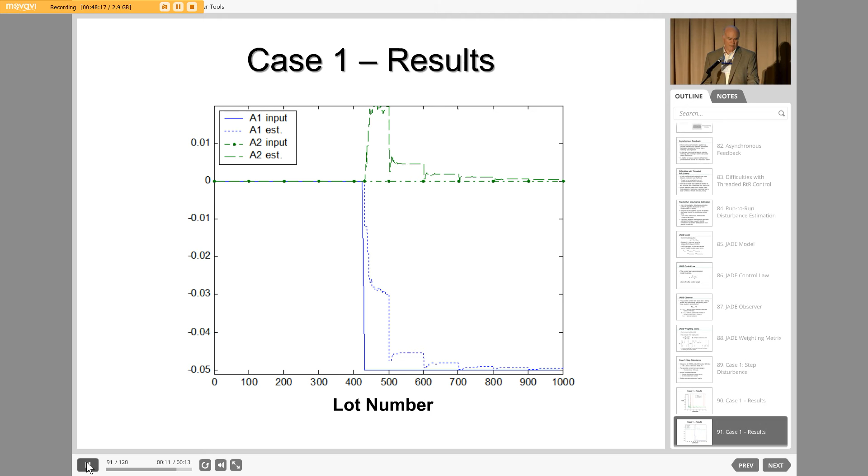Here's another example of tracking the parameters and what happens with the estimates. You can see how they ramp in over time, which is expected behavior for the parameters. This is the part about threads—if we have a lot of different products and tools, how many threads do we have? You can see it doesn't take long to get up to like 400 threads, so from a practical standpoint, it's really hard to work with threads.

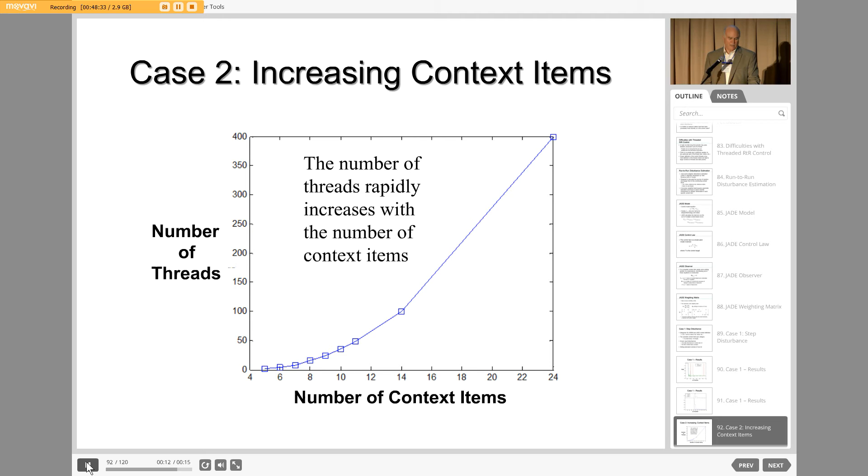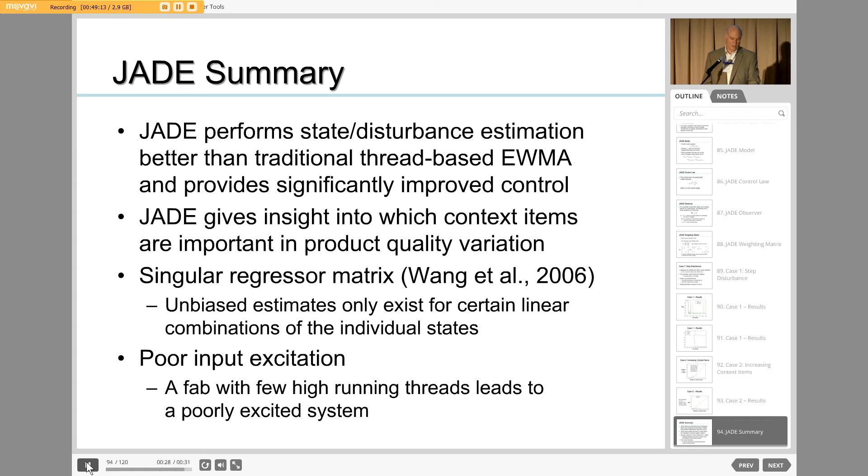There was some work done by one of my colleagues, Jin Wang, at Auburn, looking at the singular regressor matrix and also the whole issue around poor input excitation. You're relying on normal plant operation to give you enough data to do the fitting. So having input excitation—in fact some people suggested you ought to keep track of this and decide to use a tool that you haven't run in a while, so you can get up-to-date information.

Simulation work we've done with Jin looked at a number of things like covariance resetting, Kalman filtering, and EFRA, which is a forgetting factor approach. Again, the JADE approach seemed to work pretty well. Disturbance detection is still the issue with that.

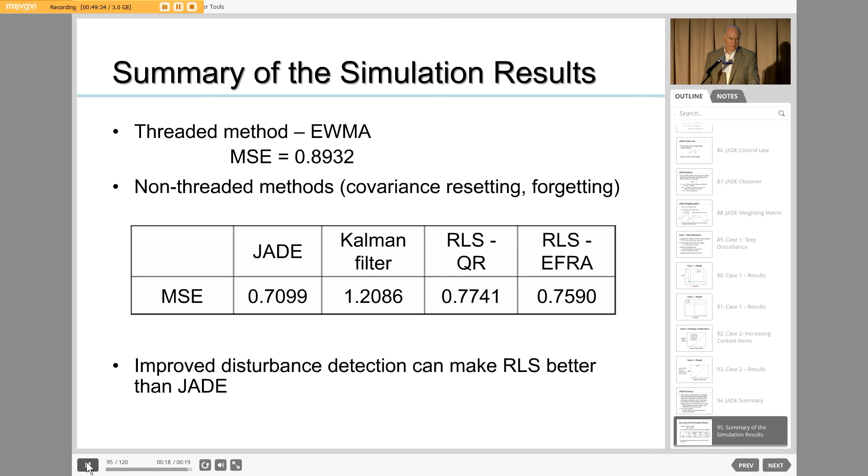The last part of the talk, I want to talk about development of shapes, because that's looking down the future. You could say this is nano manufacturing, but really the people who do semiconductor manufacturing today are already doing nano manufacturing. But this is a slightly different approach.

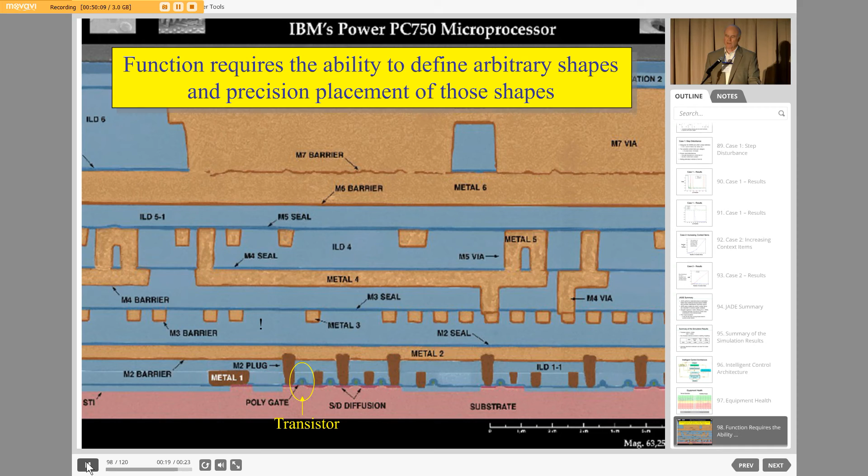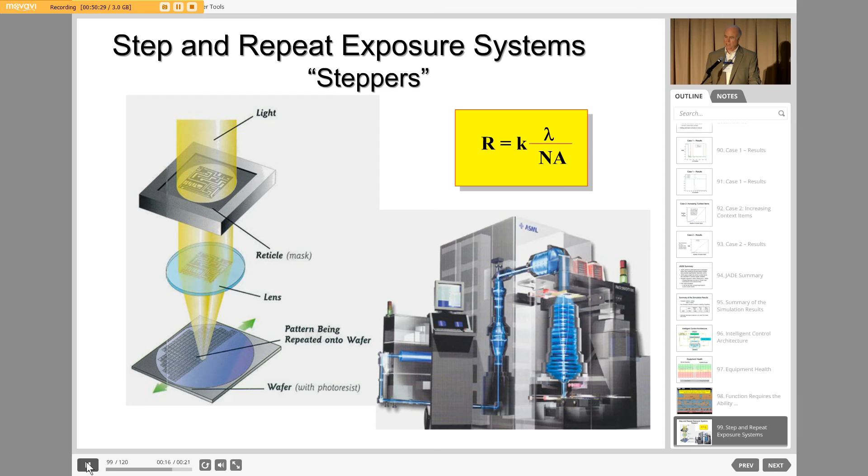The whole problem as we move to smaller dimensions will be the exposure systems or the steppers. There has to be the ability to get enough energy in order to create the image you want. That means as we go to smaller dimensions, we need bigger and bigger systems, larger in scale, and more power in order to do that.

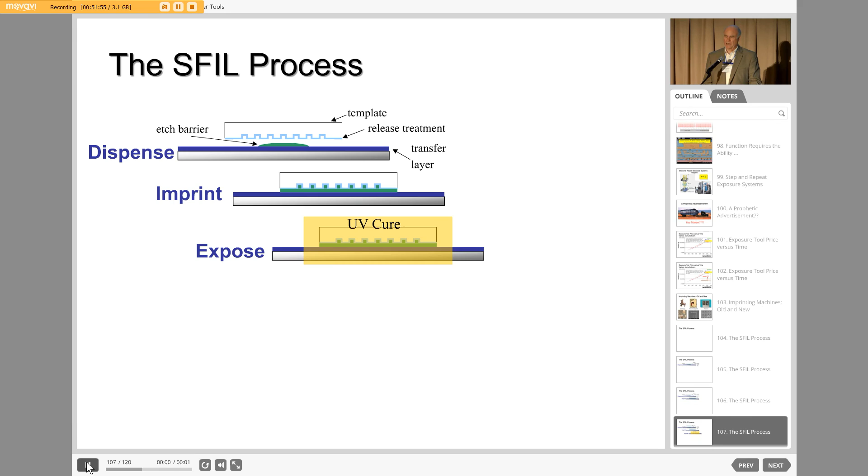There's actually an NSF Engineering Research Center called NASCENT, also at the University of Texas. The focus here is: what are the new devices we need to make, like flexible devices or wearable devices, and lots of new sensors that people want to make now. The Internet of Things is driving a whole lot of interest in how we come up with lots of cheap sensors. So combining nanoscience with societal needs, here are the kinds of things they're working on.

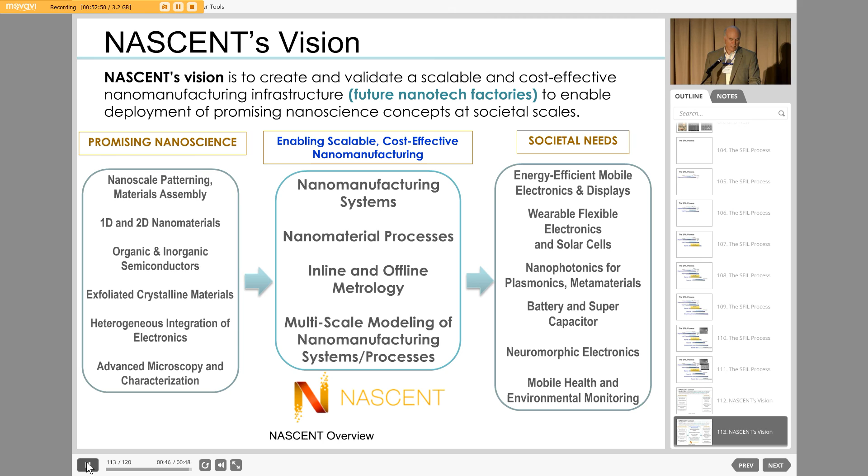I might mention that right now there's no controls people working in the center, in spite of my complaints to the PI. But he says we really need metrology in order to do control, and he's absolutely right. So again, if people can develop new ways of measuring the dimensions and shapes, that would be good.

So what are the long-term trends? I think we need more sensors, new sensors for nano manufacturing. The wafer design technology is going through radical changes. People say we used to be able to predict 5, 6 years out; now we can't predict more than a couple of years out where things are going to be. Things like three-dimensional chips are part of that, as a way of cramming more capability onto the fixed space you have. I think fault detection, because a lot of the control technology is mature, is really an area that's ripe for contributions.

Industry consolidation is happening, so the company you thought you were working with 5 years ago is now a different company, or it's been combined with another one. We're really down to like 4 big companies that make chips: Samsung, Intel, and TSMC being three of the big ones. Flexible electronics are going to really come into play here. And finally, some people are now dreaming about photonics—if someone is looking at what they should be working on 10 years from now, that might be an area worth working on.

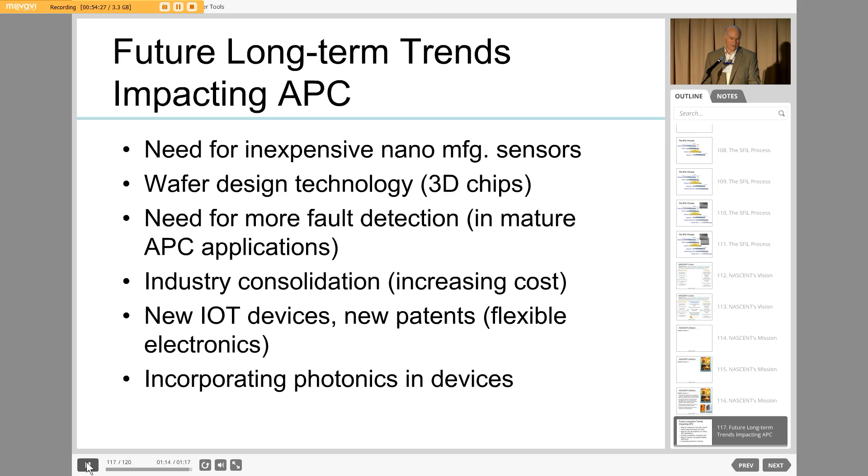So in conclusion, I think clearly we face insurmountable opportunities—there's lots to be done here. I've had the benefit of working with a lot of really smart people, bright students, and you can see a whole lot of them went from doing PhD level research on control into the semiconductor industry, and that's had a big impact.

I should acknowledge a lot of the sponsors we've had—basically the student would typically be on a co-op assignment working with the company, then come back to UT again. So we had a really good system for doing this, and that's been a great benefit.